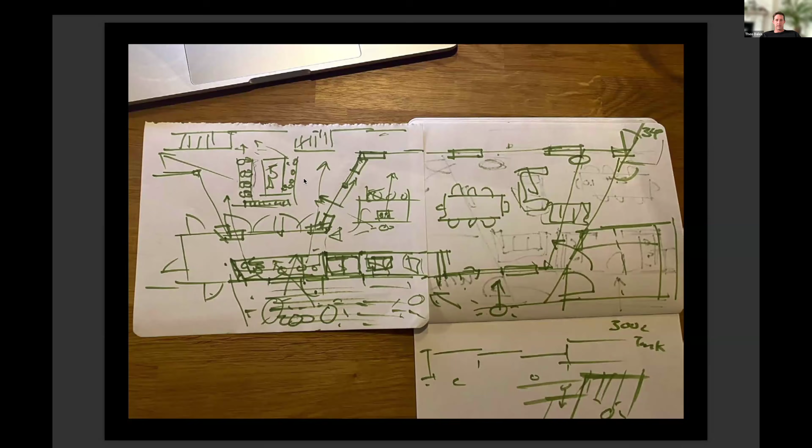We also took a lot of inspiration on materials and the interiors in terms of the landscape, the colors, tones and textures.

And we also worked through this with the planning application as well. So this was an interesting part about, there is a local design guide for the Highlands, which this building does not conform to. But what we did do is form a really close relationship working with the planning office there in terms of designing a building which is really going to fit within its landscape.

Along this road, Koto House sits at the end of it, just down here, there are a series of white buildings. And we really thought that a black building was going to fit way more appropriately and sit better with this overall landscape, partly to do with the peat and the bogs, but also just the colours of the trees and the landscape.

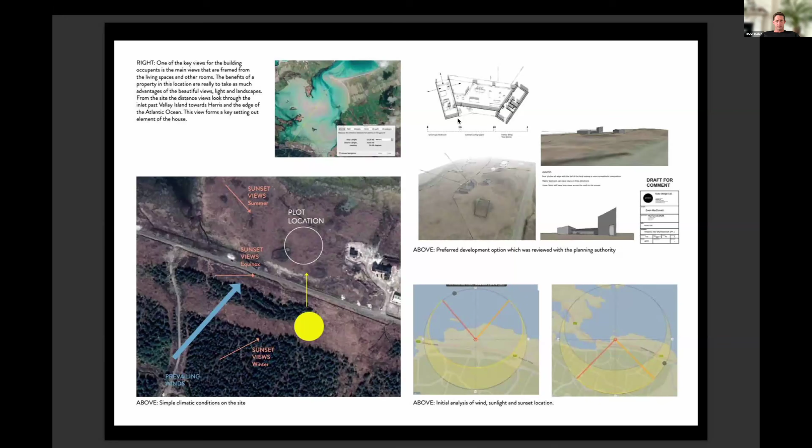So within this as well, this picks up on some of the things around the building location. So we do a lot of work always with sun path diagrams, understanding where you are, where the sun moves, prevailing winds, creating little nooks and spaces in and around the building was a really important part of this.

And this went through to the planners. And this was our planning set of drawings, which we did here. So this was one of the original visuals. And apart from this step here, it's pretty much ended up exactly like this.

We'll show some pictures at the end of these types of spaces. But really, this is about a house that is intended to bring you outside more as well. The weather can be wild, and it's a building that you hopefully encourage you to step out.

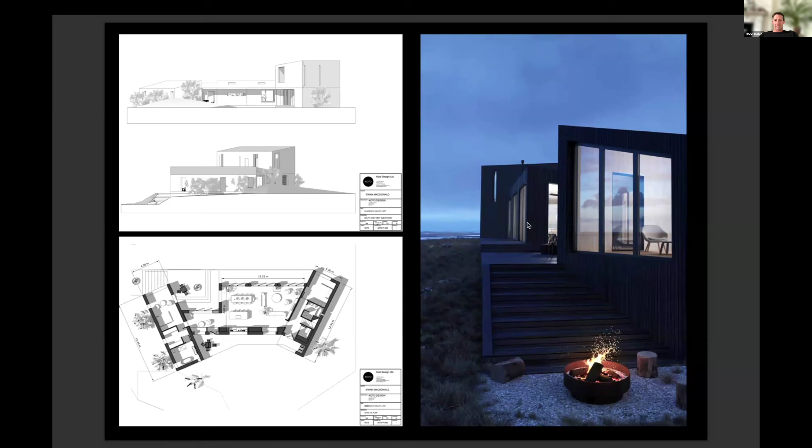It's also been occupied for the last 2 years by the family, and it's really nice that they've given us lots of feedback in terms of that it does do that. They're outside all the time. They're in the sea, they're running across the land, and it's a great second home for them.

So this is the building that's designed here. We have a 2-story section over here. So this is the main entrance, living room, 1 bedroom. This is a 2-story section. This is basically for kids and guests. This was basically mum and dad's room over on this side.

And this is the central living space here, which we broke down into a series of zones with large window seats, a kitchen within here, a large dining table for 12 people, and then an outside courtyard area as well.

This area here is really interesting, probably one of my favorite spaces on the building, where this sits under a covered canopy, but you get morning sun, you're protected from prevailing westerly winds, and this sits by the edge of the kitchen. So in terms of a place for you to sit outside and have a coffee in the morning, this is a really important one.

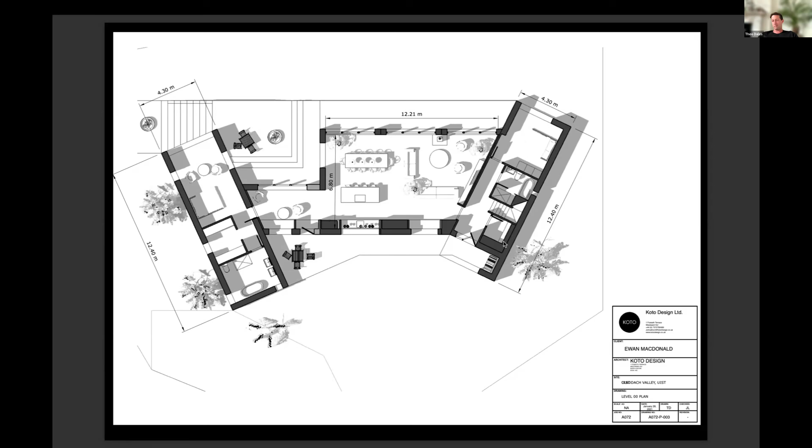And interestingly, you get really extreme sun angles, especially in the summer. The sun sets right up here, so this area is a lovely spot where you get sunsets that come right into this courtyard. So the angles on this building were very much tied into its location from a planetary point of view, but also from a more local landscape standpoint, relating to local landmarks and islands.

This is then how we break the building up. There was a lot of design work to get to this point. This is a really simplified breakdown of the modules in terms of how they sit. So all of these areas were built in single pieces and essentially fitted together like this.

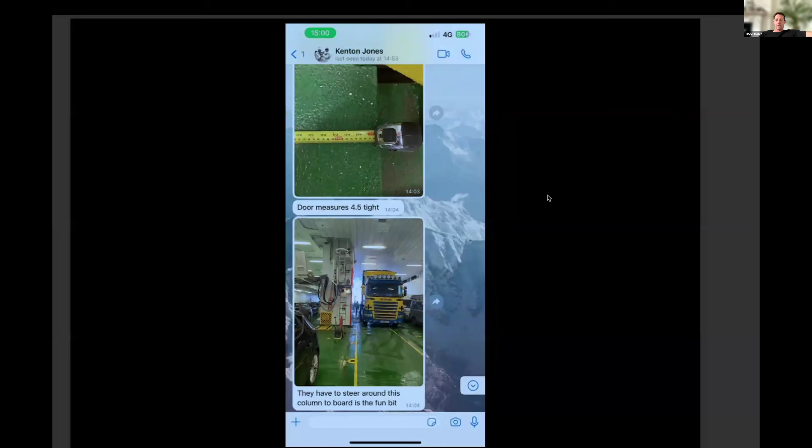A really key part of this - and this is a screenshot from my chat with Kenton when we were designing it - is, is it going to fit on the boat? So you can see here, the door to the boat is 4.5 meters tight. And if the building didn't fit on the boat, then it couldn't get to the islands. Seeing as the building was almost completely constructed in the factory, it's obviously pretty critical what it did. So this was a really key part of the design process, which fed into all the development of the plan, the modules, the engineering, and how everything broke down together.

They also worked with a brilliant haulage company who were again excellent problem solvers in terms of delivering this project. Just a word here, which I'll let Rob touch on more, around embodied carbon.

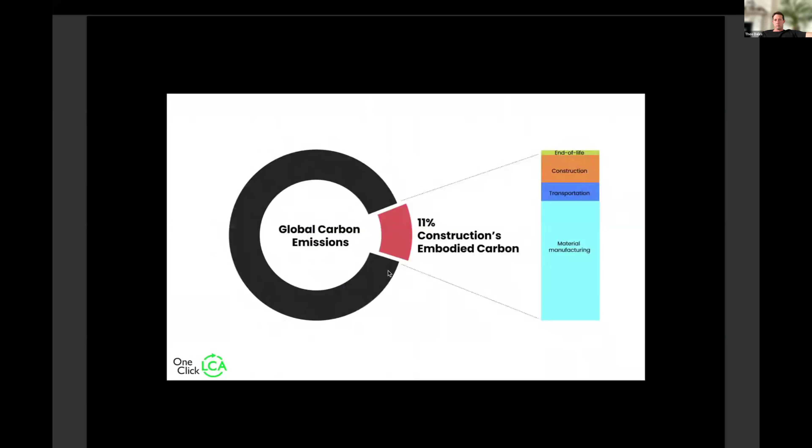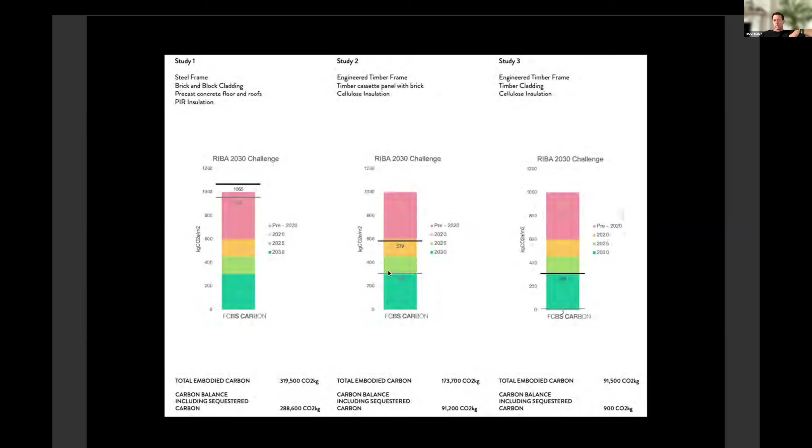We also did a series of interesting work - I used to work at Feilden Clegg Bradley for 10 years before we started Koto in 2019 - and we did some work with them looking at an early carbon calculator, which they did around 2020, looking at the same building built essentially in a steel frame with brick versus an engineered timber frame with timber cladding and cellulose insulation, in terms of the overall embodied carbon footprint. But I'll let Rob touch base on that a little bit more.

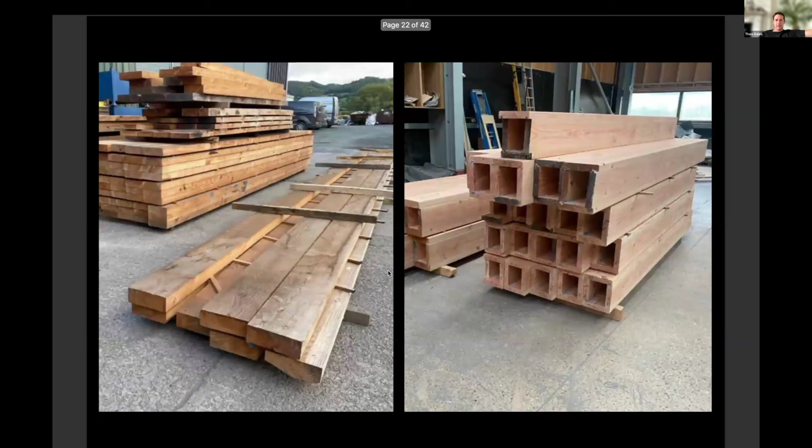I'm not going to dwell on these because Rob will go into a lot more detail, but these are the beams which were formed in order to form the modules of the building. We also had a really challenging environment to work in, and there's also really challenging engineering which you need to take into account when working in this way.

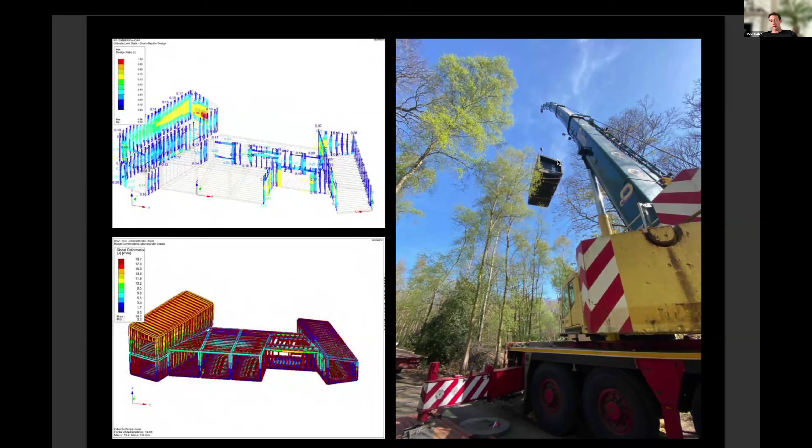This is an image from another project, but these are the sections of the building, and this is how they're installed as well. So not only do we need to design a building to withstand extremely high wind loading, we also need to design them to be craned, lifted, and transported as well. So there's a whole series of additional engineering work that needs to go into developing a building you can deliver in this way.

And again, just in terms of the complexity, and really impressively, the joinery tolerances which Kenton's factory works to - we've never seen anyone else that works at the same level of tolerance and craftsmanship, even for really simple things like the primary structure of the building.

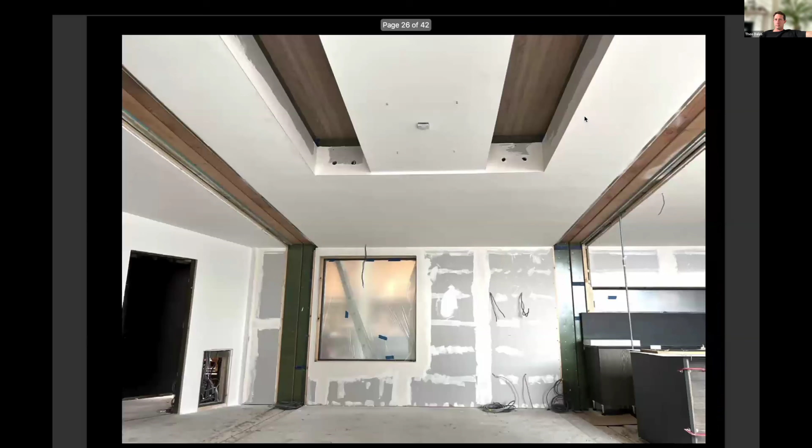Well, we'll touch base on that. What we do in the factory is we take things to a much higher level of completion. So what you can see down here is splits in the modules. These would basically be plastered up at the end on site.

Once it reached site, the roof lights, windows, everything's installed, parts of the kitchen. In this instance we had one continuous floor, so the flooring actually went in after the building was installed. Also with this project, it probably left the factory a few weeks before it should have, because we had a specific window when we needed to transport the building. In the end, the split of time was it took about 3 months for the final site finishing, done by a team up on site.

So this isn't quite the factory - it was more complete than this when it left the factory, but it gives you a good idea for how far we're taking buildings in this location.

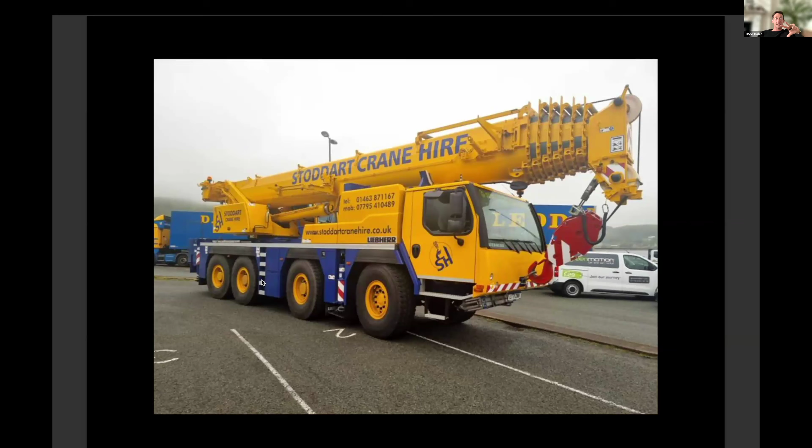These larger modules are about 4.2 meters wide, so they're obviously oversized loads. We also needed a crane which came across from Inverness. So all of that needed to be coordinated at the same time in terms of logistics.

What's amazing about this is we started essentially with a flat site in the morning. There's a longer story to this, which Kenton might be able to tell, but getting everything there and coordinated at the same time was a huge effort, and there were boats cancelled, people didn't arrive, but once they got started working through the process, the whole building was installed within 24 hours. So from a flat site, it's almost a complete building being there. That's down to the craneage, hauliers, teams on site, teams in the factory, the design, the engineering, and all those other pieces that work and fit together.

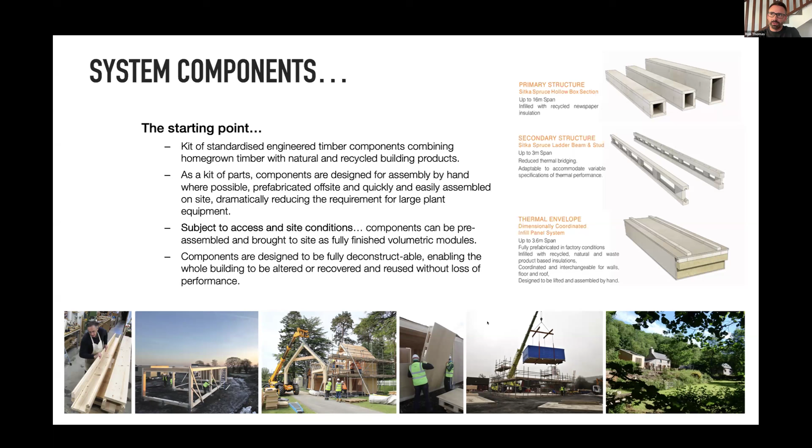And when it comes to volumetric, we're not immediately steering towards steel as a kind of chassis or stability mechanism. So we then developed this through a series of buildings. The first one was this classroom for the Gwent Wildlife Trust, which used the post and beam frame with really large spans, or really good spans, with a SIPS panel infill.

Then a second project looked at how could we use an infill panel to span as a secondary item, again using homegrown spruce. So they were really incremental developments with each building that we looked at.

But a big kick on and a key driver for the move for Kenton and Unnos Systems was this project for the Isle of Anglesey County Council. We did 6 volumetric affordable homes, all through COVID. So this was a really turbulent time, really.

But the ambition to go into volumetric was really all of those ideas around volumetric, bringing the supply chains closer, reducing waste, helping to develop local supply chains, but also the people you really depend on and know and trust, bringing all of those resources into a factory environment, and then also giving the ability to develop, to build in some really challenging environments, but giving it the security net of a factory environment to do most of that work.

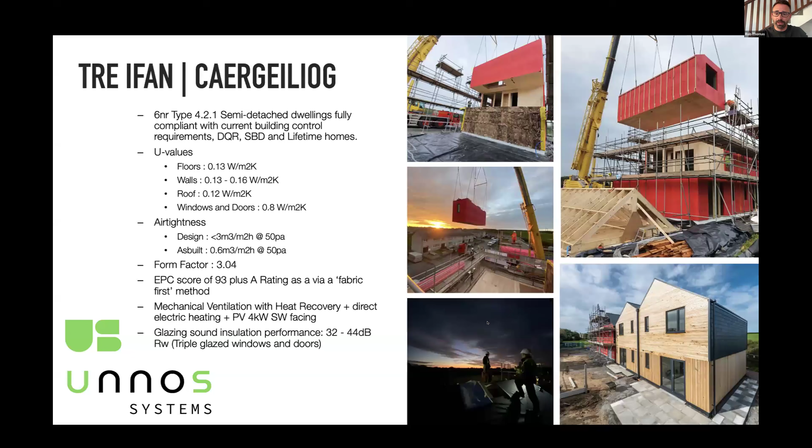This project, which was backed as one of the Innovative Housing Programme projects, meant that we could push on into that. And the amount of advancement of technical resolution through this was really amazing. We tackled each pair of houses as another little research project in itself, and advanced a bit more with each one - how much work was done in the factory, how much was site-based - and really refined some of those items.

And then that brought us to Koto, which by the time that the collaboration with Koto came along, I think that what Kenton was offering was already exceptional - a wholly timber-based volumetric system, really focused around the homegrown timber product and the homegrown supply chains, natural materials, recycled insulations, giving really good energy performance, but then with the background of them being able to do everything to the interior, the finishes, to such a high standard, meant overall the offer is I think fairly exceptional.

There's a bit of data - it's really high performance. I think the form factor means that we were never really looking to go to a passive house certification standard. That wasn't part of the agenda necessarily, but all of the criteria that you would look for around air tightness and U values, thermal bridging, is there.

So I'm going to just now jump onto a little video of the clip. Oh, we're doing okay for time.

So the video is just 7 minutes. We'll talk over it a little bit, and it's a little bit rough and ready, but hopefully you get a bit of a picture of the process, and a bit of some of the kind of environment that this is done in.

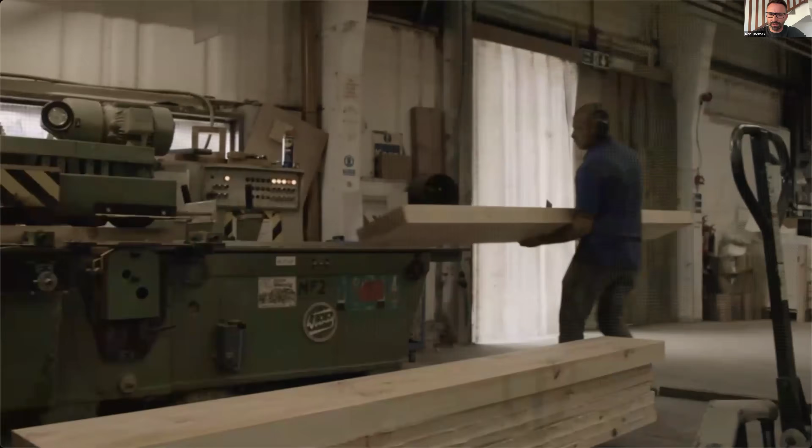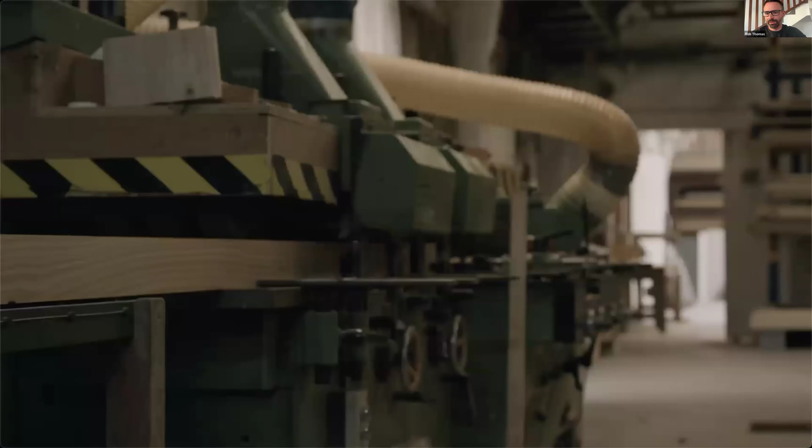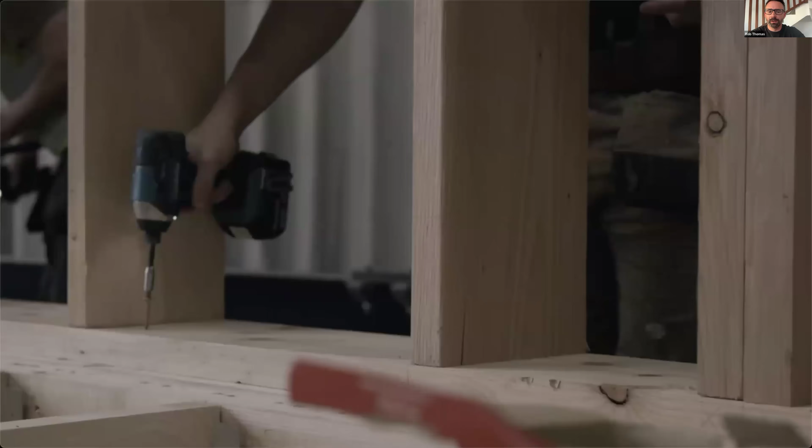I think what's been exceptional about the R&D project is we've really developed close interactions with the forestry, and Theo showed some photos, like we can pinpoint where these trees came from. The stock can be established almost at standing stage, and we are at that point where Kenton's going into the woodland and identifying the trees that he wants, and it's standing there ready for the right project to come along.

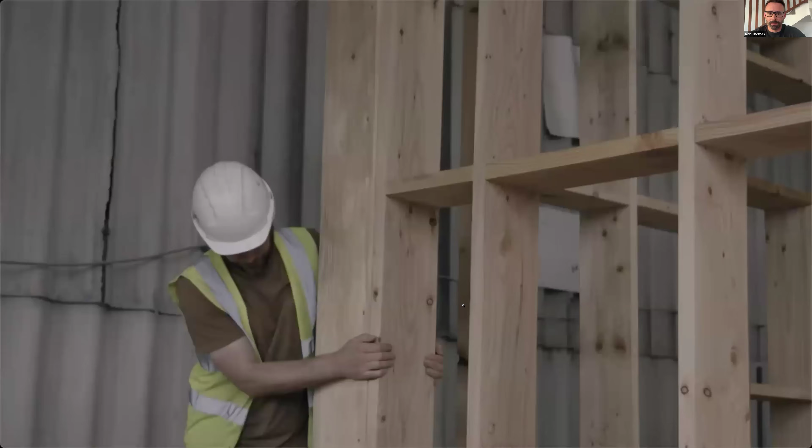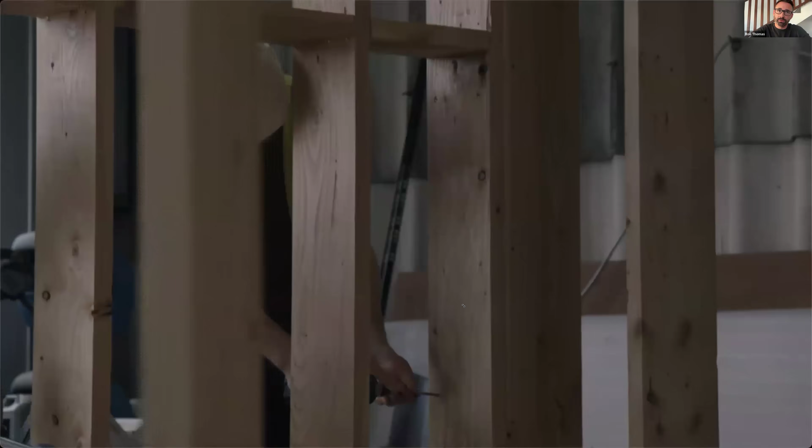Some of the points in this, it's assembled quite similar to a traditional site build. You're making panels, but the key thing is this post and beam frame, which acts as stability, and then the use of glue. So you're able to bring diaphragming all the way through the outline of the 3D module.

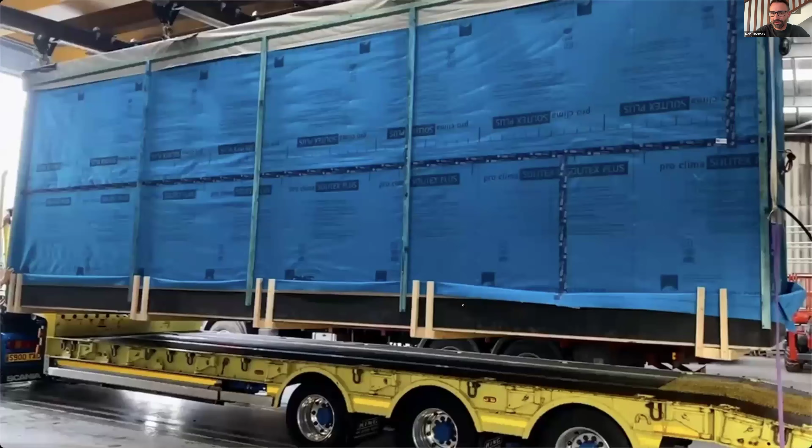Another key development was how to lift these. A lot of lifting in terms of volumetric is done as a harnessing from the underside, which means the junctions are all a little bit more complicated. One of the things developed quite early on was a strategy to lift through the frame, using the stiffness of the frame, but also meaning that the junctions are much closer tolerance, so the level of finish is a much greater achievement.

Some of the modules being transported are, as Theo said, predominantly finished. The ones that are basically enclosed, 4 walls and a floor, were fully fitted out - bathrooms installed, tiled, plastered and decorated, with the amount of defects occurring on site really low. I don't think there was any issues around transportation.

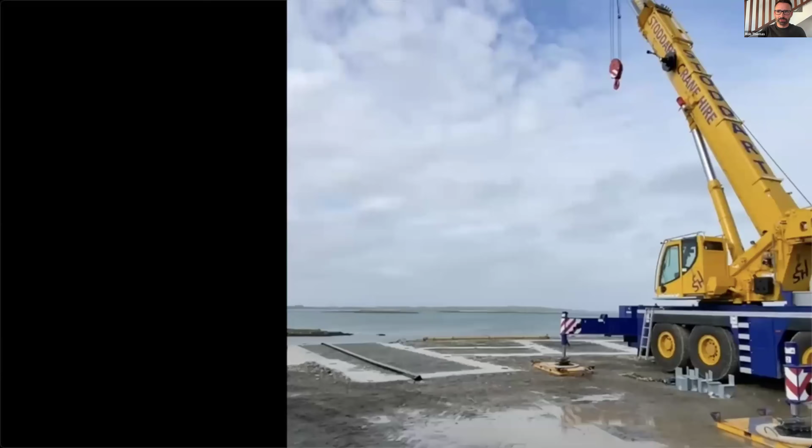Obviously, all of the wonderful scenery, it travelled by truck, then the ferry, which really governed the size of modules, and then you get to site and you hope everything arrives at the right time.

Theo mentioned about all of the planning that goes into getting these people here at the right time with the right plant, and it was exceptionally planned, but actually this is the delivery stage. If you were having to do that on a building of this nature in this environment, it would be pretty much impossible, because everything has to come to the island to be able to make it happen.

So you can see the lifting is all done from above. Triple glazed windows installed, it's battened, ready to receive finishes. The roof isn't on, so the first action immediately following installation is the roof.

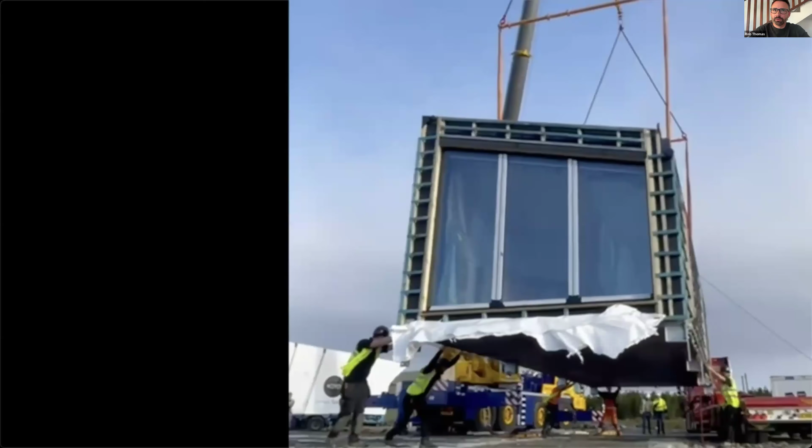One of the key points is this interaction with the ground. It's a suspended timber floor, which for the volumetric and prefabricated market is one of the challenges to overcome - that junction with ground, making it feel like it still is embedded within the ground rather than sitting on top and feeling temporary.

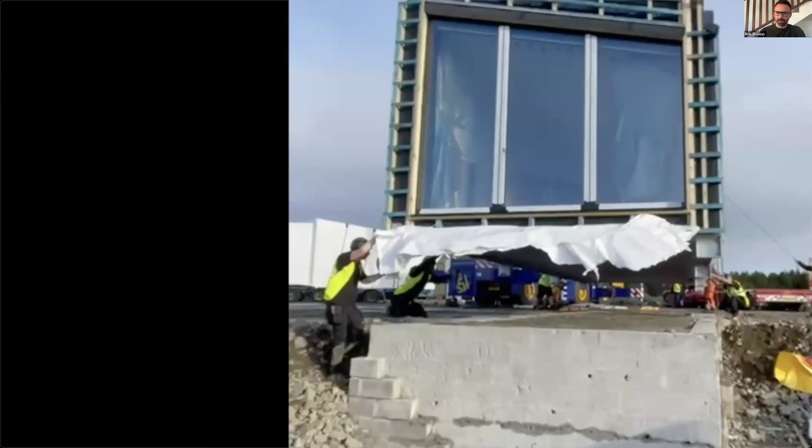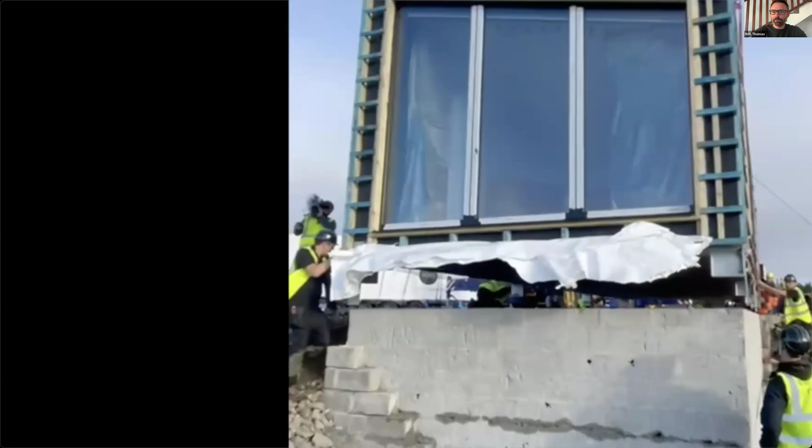Part of the design objectives we were trying to deliver, so those early images where the building is trying to grow out of the ground and really bed in, was all around these junctions - getting them really precise, being able to continue cladding down to meet the ground, which from a ground worker point of view requires a specific tolerance. That's part of the learning process - we've really had to develop that quality of ground worker delivery to match the tolerances that Kenton's able to work to.

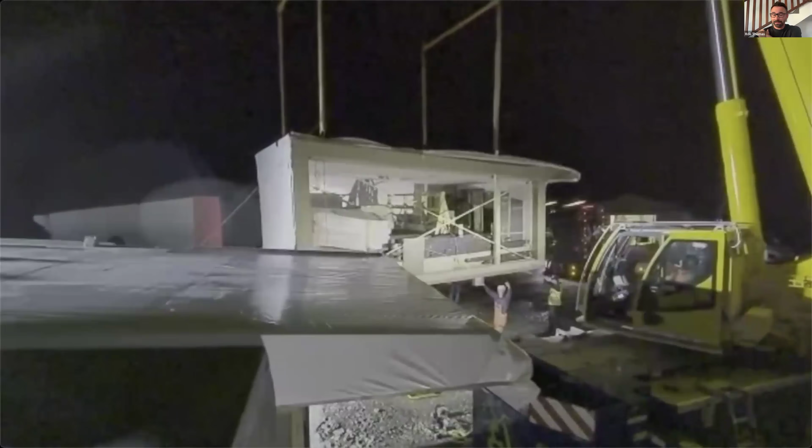You can see a module here, which is one of the open-sided modules, fully loaded with furniture, cladding, materials - everything came across on those boats in as minimal a trip as possible, including people. All of the finishes, the utilities, the fridges, freezers, the works - it all came across. There were no people in the modules, to be clear, though.

I don't know if you can get a picture from this, but the wind in some of these clips is just incredible. So they're trying to navigate really close tolerances, coming into a junction around 10-15 mil abutment to the next module.

This was happening with the module blowing around in wind and rain, and with a really tight window, as that crane had to get back on the next ferry, so there was no time to dwell. I think Kenton had a few stressful moments.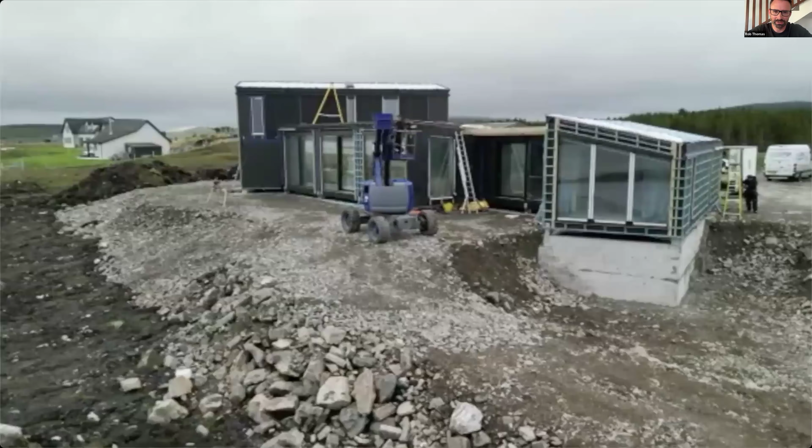That image shows one of the details that's quite an interesting challenge - you start to get a picture of the level of finish. This is the day after installation, with all the modules in place - 7 modules, 2 making up the double height element, ready for external finishes. And this clip is very near completion, just the landscaping works left.

Yeah, so there's a couple of technical slides. Shall we just go into doing a few questions? If it's okay, we'll just jump into a few questions, and maybe those slides will come up during the discussion. In any case, I probably expect so.

I'm going to do my best to string together a few of the questions we've received across the session. The first one I wanted to get into was around procurement - we've had a couple of questions about the manufacturer, and about working with modular systems and volumetric type systems. How important is that early engagement, and how did it happen in this project? At what point did you start engaging with the manufacturer?

That really early, like pre-planning - during the concept design stage we were working with Kenton, since we'd already been working together on other projects. For this one it was done at a really early stage. On other projects we work with multiple manufacturers and go through a tender process, but this project specifically, in terms of the level of quality which can be delivered by one manufacturer and the logistics required, we worked with Kenton just with this project from the outset, doing early stage costing as well - so as we developed through the process we benchmarked where we were. We did costing at stage 2, stage 3, and then a full costing at stage 4, which is essentially the contract price from there.

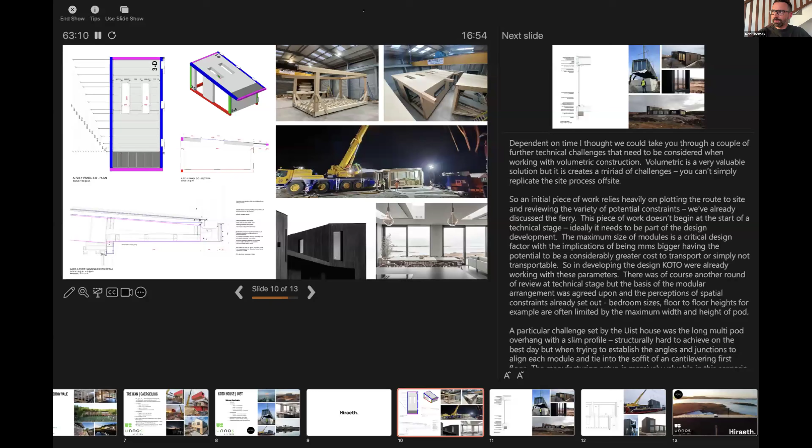Although I think what you saw an image earlier on of the structural model as well is that it was all tested in terms of the BIM model. So everything was modeled in 3 dimensions as well. So I think with that, and that leading then to the CAM drawings and fabrication information, meant that it was pretty well tested before it ever got to site.

Just in terms of, again, one thing you guys have done which is really interesting here is those open-sided modules, which has allowed you to treat that really quite large open space in the center of the building, which seems a bit different, or challenges some of the preconceptions around modular design. So has that always been a part of your work, or was it quite specific to this build?

Yeah, definitely. A lot of that is, modular construction and volumetric modular construction in some instances can look like a series of stacked boxes put together. We approach it as architecture first that needs to deliver for its site and for its clients, that's our approach to it. And there was many iterations of how those modules worked and fitted together in order to put those kinds of spaces together. And also it's challenging as well. Like the way we did the initial concept design was, can we do this weird triangular module in this corner because that gets us this big long space? So there's bits where we're working through with the factory and with the designers, like, is that going to fit on a lorry? Is it going to balance funny? There's things like that we need to work through right from the outset. So there's a lot of work that we do, and we've developed over the years in terms of how we design those types of spaces to really work.